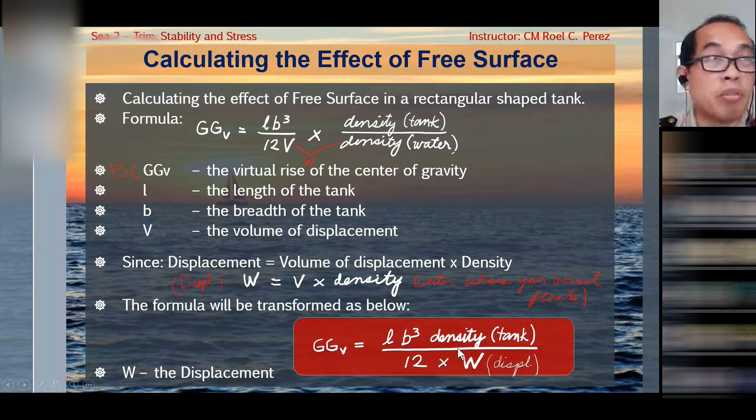So here, may legend din dyan, the W is the displacement. So ito po gamitin natin na formula, which is almost the same, kaso nga lang doon ay iba. But this is easier. Okay, so here, I have an example.

A ship has an initial displacement of 13,000 tons and a KG of 8.2 meters. A rectangular cargo tank with a length of 40 meters and a breadth of 22 meters is partially filled with 10,000 tons of oil with a relative density of 0.85. If the KG of the oil, so small g, ibig sabihin center of gravity of the oil, is 8.5 meters, calculate the effective GM if the KM for the final displacement is 9.88.

So there are steps to do this. This is easier, no? Step 1, take the moments about the keel to calculate the new solid KG.

Ang tawag natin sa table na to, this is KG table. Your initial displacement, 13,000, tapos yung karga mo, your cargo is 10,000. If you add them, that is your final displacement, which is 23,000.

Because we are taking the moments, remember that the formula for moments is weight times distance. Your KG here is actually distance from keel, di ba? Kaya distance din yan. So 13,000 times 8.2, which is your KG for the vessel, that is 106,600. Then yung 10,000 naman is multiplied by the KG of the cargo or the liquid inside the tank, 8.5, that is 85,000.

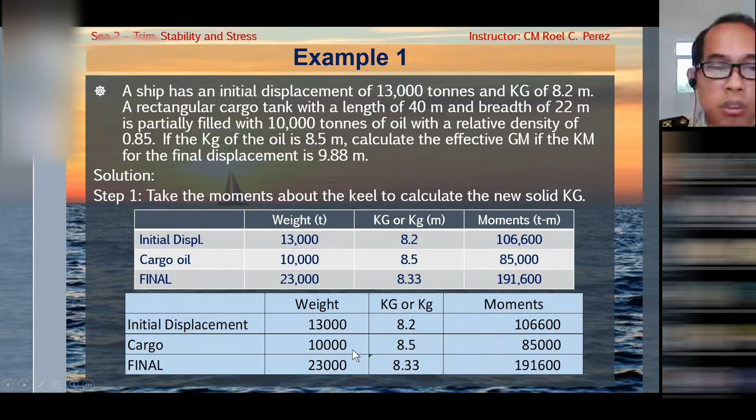Okay, so you can also use Excel, no? Nakita nyo to, this is actually an Excel, no? Kaya lang, pag Excel kasi, dito, I will show you paano gamitin yung Excel. You can make your formula. Yan, Excel na to, di ba? So, i-type mo lang yung mga nandyan, tapos ito.

And this one, so ganito lang, di ba? I-multiply mo lang yung 13,000 times 8.2. Nakita mo yung cell doon, equals B2 times C2. Tapos ganun din gawin mo sa kabila, i-drag mo lang. Tapos dito naman ay auto-sum. And auto-sum. Tapos dito lagyan mo ng formula, which is moments, total moments, D4 divided by total weights, which is B4. So automatic na, automatic na yung iyong Excel.

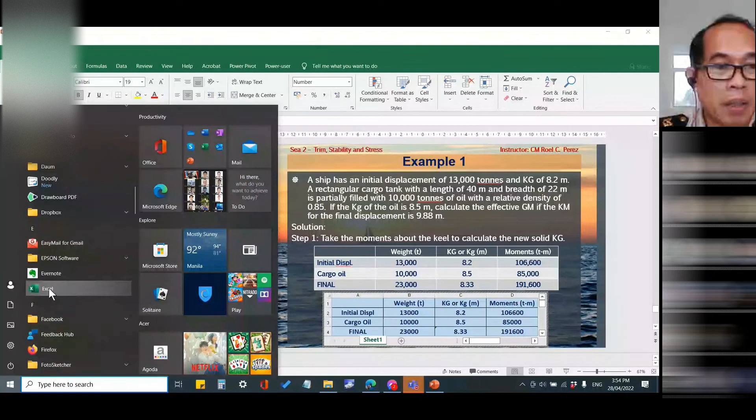So you can use Excel in your formula. I will accept that. Pero sabi ko nga, you can open your Excel, pwede mo yun gawin, ano? For example, I will open mine. Okay, Excel.

Okay, kung gusto mo i-select all, dito sa corner. Siguro marunong na kayo nito, ano? Kasi nung kami nag-aaral, wala pa kami Excel eh. Okay.

Ang hirap. Okay. Okay na yan. Okay, palakihin ko pa. Yan.

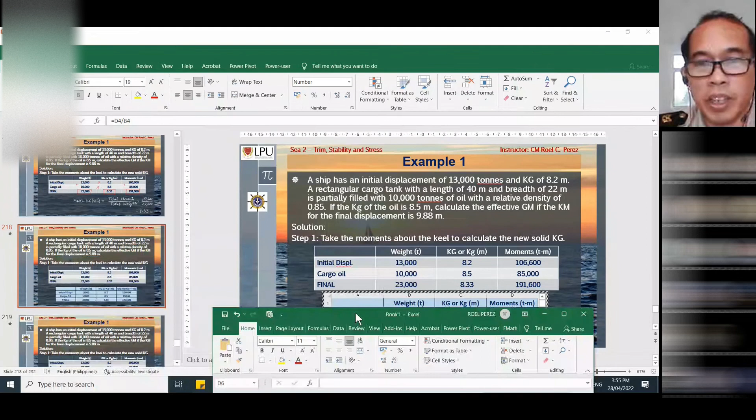Okay, so here, palitin natin para makita yung given. So as you can see here, ilagay natin dito is weight. Okay, so lagyan natin ng borders, all borders. Tapos doon sa taas, lagyan natin ng weight.

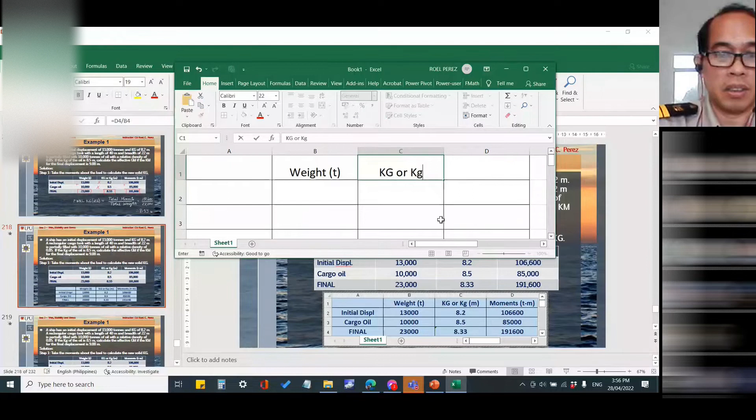In tons. Pagliit. Okay, so ilagay natin center lahat. Tapos siguro nasa 22. Yan. And then the next one is kg, small g. So ilagay mo na rin yan para di ka na masulat nang masulat ng meters.

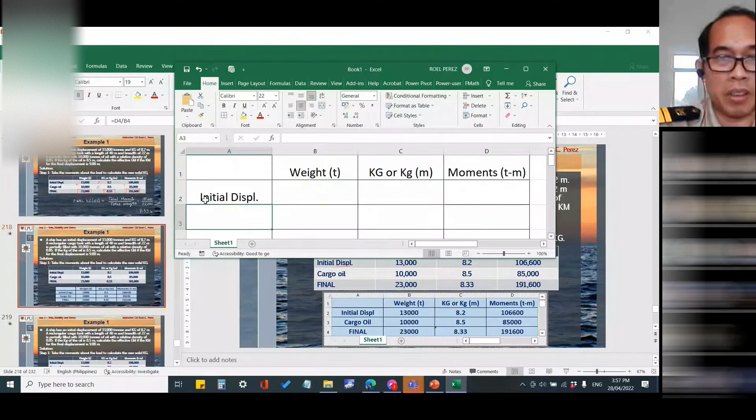And then doon sa huli naman is moments, moments in tons meter. Yan. And then dito is your initial displacement. Initial displacement, yan na lang, mahaba masyado. And then here is your cargo, which is oil. Ito naman is final.

Ngayon, para hindi ka magkalituan, pwede mo ilagay dun sa baba yung final kg. May mong malito, no? Tapos okay, here, 13,000. So this 10,000. Dito, mag-auto-sum ka lang. Di ba? Auto-sum. Enter. Yan na.

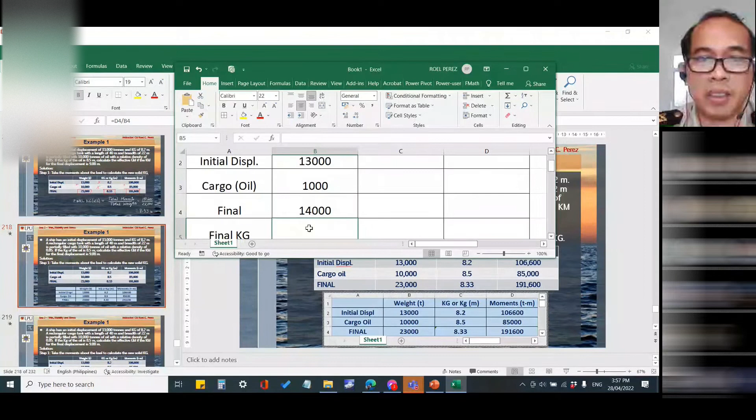And then yung auto-sum mo na to, you can copy this. Control-C and then paste it on the other side para meron na siyang formula kaagad. Okay, tapos ilagay mo yung kg which is 8.2 and 8.5. Tapos tandaan mo na yung moments ay equals weight times, yung asterisk times, no? Times kg.

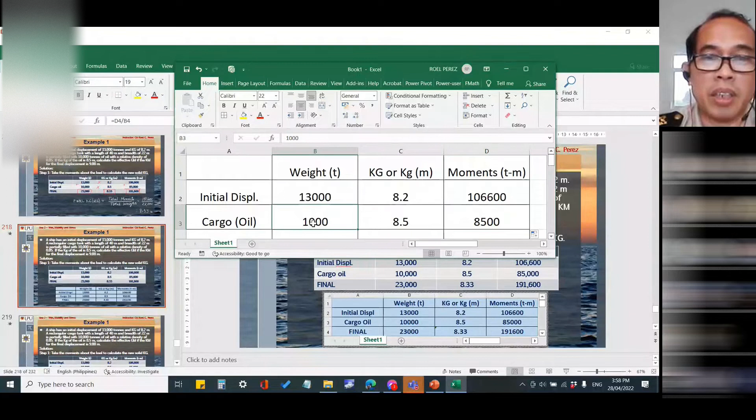Okay, so meron ka 106,000, di ba? Ngayon, para hindi ka na mag-type ulit, just drag it like this. Yan. Ay, kaya pala 1,000 lang nailagay ko dito. Oh, 10,000 pala ito. Okay, so 85,000. Yan, meron na, no? Ngayon, ang problema na lang natin ay yung final kg, no?

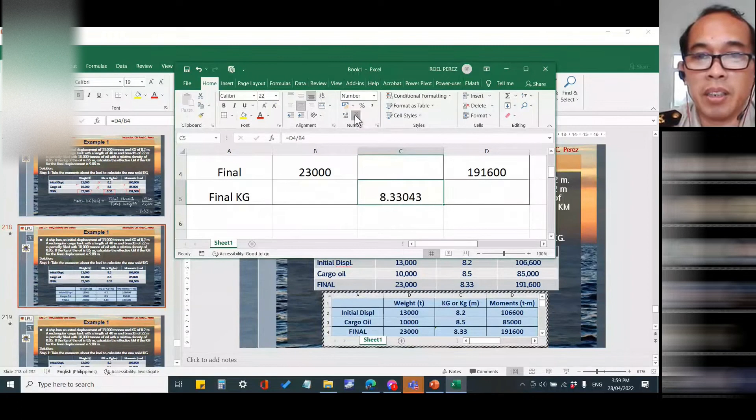Okay, so dito ko ilagay para hindi niyo pagkamalang average equals, siyempre ito, 191 divided by 23,000 equals, yan, di ba? Ngayon, palitin mo yung decimal hanggang 2 decimal places. O, yan na. Automatic na siya na mag-round off.

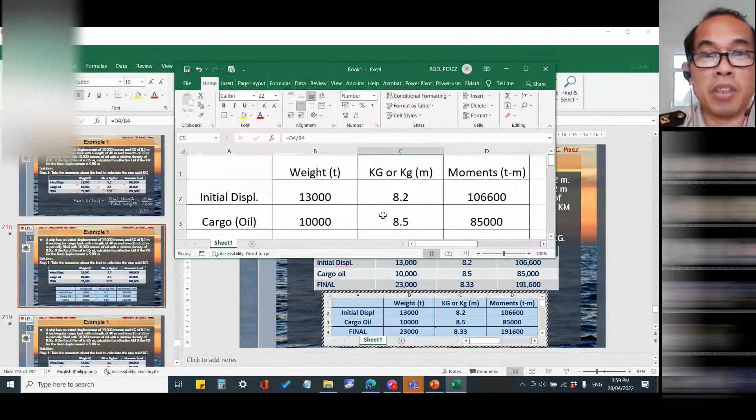Di ba? So you can use this in all the problems that you will encounter, no? Kaya sigurado na tama ang iyong sagot. Naintindihan ba? Naintindihan ba yung aking ginawa? O hindi? Yes sir, yes sir.

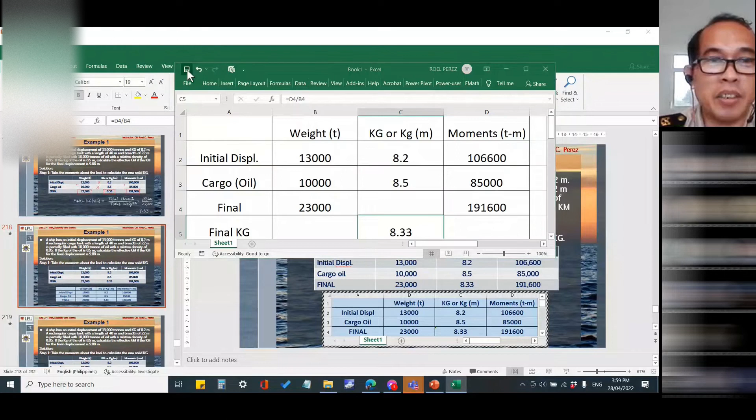Di ba napakadali? Okay, save ko to. Pero hindi ko bibigay sa inyo. Gawin nyo kayong gumawa ng sarili nyo. Ano?

Okay, step number 2 is to calculate the free surface correction. Using yung formula natin, which is GG sub v is equal to length times breadth cube times density of the liquid inside the tank, divided by 12 times weight or displacement. So the length of your tank is 40 and then the breadth or width of your tank is 22.

And then the oil is 0.85 tons per cubic meters. And then divided by 12 times 23,000. Bakit 23,000? Because you are using the final displacement. Siyempre, nagbago na yung displacement mo eh, nagkarga ka na, no? Okay, so using our calculator again, using our calculator.

Okay, calculate natin. Ano? So 40 times 22, so tandaan nyo na pag nag-cube ka is x raised to y, 3. Yan. Times 0.85 equals, and then divided by parenthesis, 12 times 23,000 equals 1.31. 1.31 meters. That is your free surface correction.

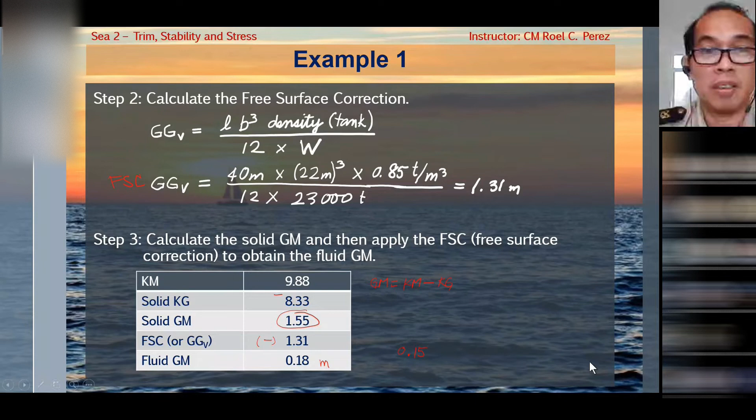Okay, so free surface moments. What is the free surface moment? This is the moment of inertia, or the second moment of area, of the free liquid surface inside a rectangular tank, which may be found by the formula: I, or the moment of inertia, is equal to length times breadth cubed divided by 12. That 12 is constant.

The free surface moment is found by multiplying the moment of inertia by the density of the liquid in the tank. Because this is a moment, its unit is tons-meter. So this is the FSM. FSM, meaning free surface moment, is equal to length times breadth cubed times the density inside the tank, or the liquid inside the tank, all divided by 12.

So that's the formula we will use. Remember, the free surface correction formula is GG sub v equals length times breadth cubed times the density of the water inside the tank, divided by 12 times displacement. We can transpose that: if you notice, if we remove displacement from this formula, that is your FSM. And because displacement is at the bottom, we can transpose it as GG sub v equals FSM or free surface moment divided by displacement.

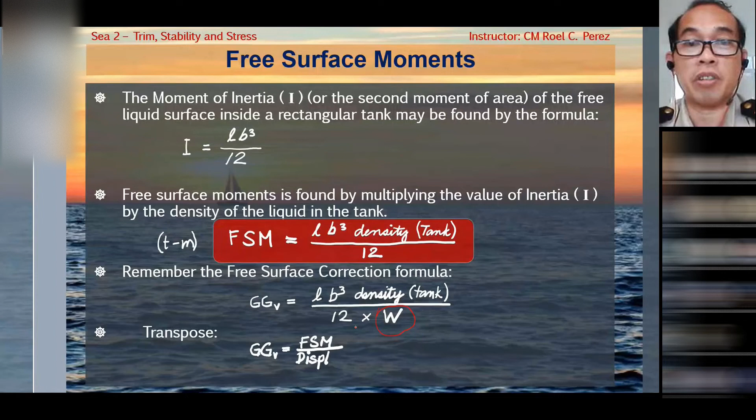Since the final kg is equal to the total moments divided by the total displacement, it shows that the greater the value of the free surface moments, the greater the value of the effective kg, leading to a greater loss of the metacentric height. As your free surface moments rise, your kg also rises, leading to greater loss of metacentric height, so it decreases even more as it rises.

To calculate the effective GM, take into account the effect of free surface and add the free surface moments in the kg table under the moments column. So if you remember our kg table...

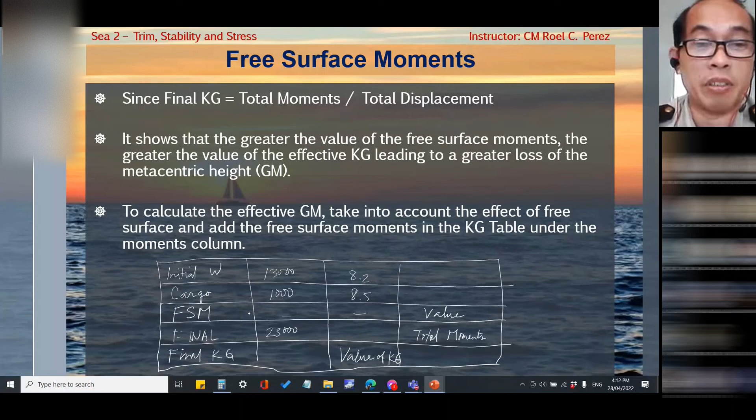Anyone? What is the value of KG? Is it solid or fluid? Solid, sir? Okay, because the first one we did, that is solid, right? However, here, because you already added the free surface moments, it means this is already affected by the free surface. So that means this is already your fluid KG.

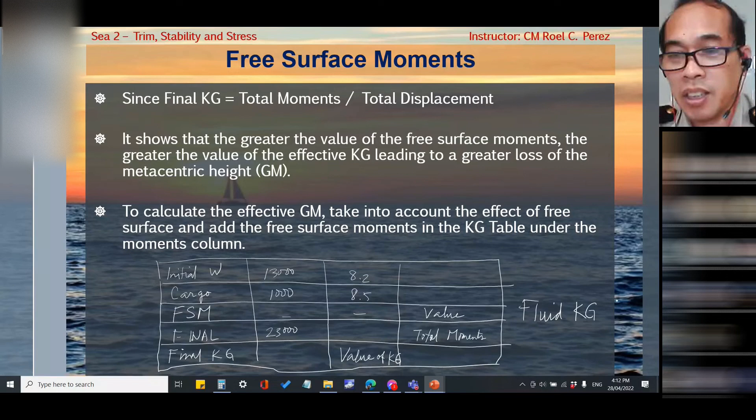Understood? Okay, so I will give you an example so you can understand better. This is example number 2, but the same problem. As you can see, the same initial displacement, the same KG, the same length and width of the tank, the same cargo, and the same KM.

Okay, so the solution, here is step 1. Calculate the free surface moments using the formula. That's our formula. So remember this, it's up there. 40 times 22 cubed times 0.85 divided by 12. So that will be your FSM or free surface moments.

Okay, let's multiply. 40 times 22 cubed times 0.85, divided by 12. Okay, you see? 30,169.33. So two digits is enough.

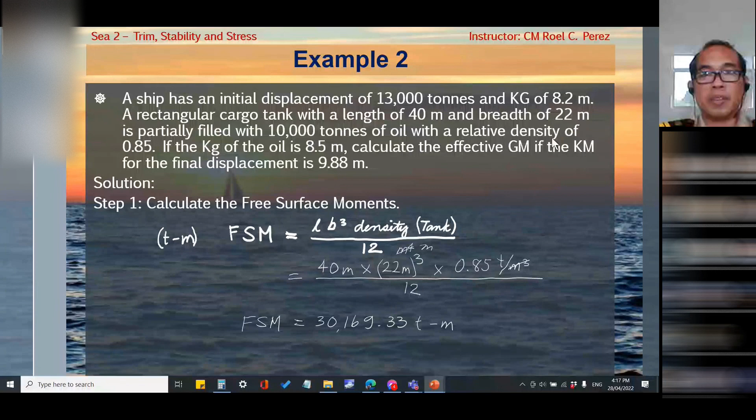Okay, let's go to the KG. Okay, so that's how it is, direct already. But I believe the formula in example number 1 is safer. Why? Because the result is smaller, since our computation isn't perfect.

So which do you prefer, bigger or smaller? Of course, the smaller one, because what if there's a slight error? At least you're already on the smaller side. Whereas if you get a bigger value, it is more dangerous. Although what we want is a bigger GM to be sure, that's a different situation. It means you need to adjust your cargo to obtain a larger GM so that whatever the effect of the free surface is, you're safe.